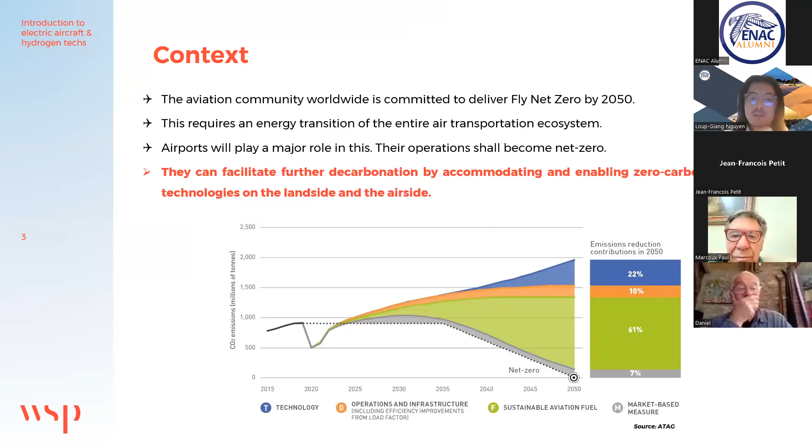So in this presentation, I will talk mainly, of course, about electric aviation, but also how airports in general will have to facilitate this decarbonization by accommodating and enabling all this new mobility technology from the land side to the air side.

So I want to give a quick definition. I'm pretty sure you all know it, but it's always good to have a common definition. So what is an electric aircraft? Well, it's pretty simple: electric aircraft are just aircraft that have parts or all of their propulsion system powered by electricity, stored on batteries or generated from hydrogen through fuel cells. You also have configurations of kind of hybrid systems.

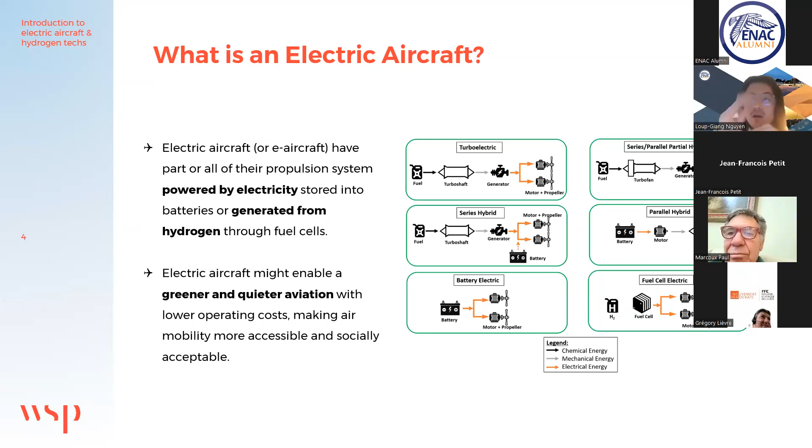And with electric aviation, one of the main objectives is to enable a greener and quieter aviation. We are expecting also lower operating costs and making air mobility more accessible and socially acceptable.

So usually when people think about electric aircraft, they think about eVTOL. But actually eVTOL is just a part of a larger, broader concept. As you can see, there are 3 performance capabilities we can classify under electric aircraft. The first one is VTOL, vertical takeoff and landing, which is mainly helicopters. They could operate mainly in dense urban environments.

And the 2 other ones - the first is STOL. They typically transport between 6 and 60 passengers, and they are suitable for commuter or regional missions. The infrastructure they operate on will be what we call short runways, so runways less than 5,000 feet approximately. And the last one is CTOL, which are just conventional aircraft.

So when I talk about electric aircraft in this presentation, I'm thinking about these 3 categories of aircraft.

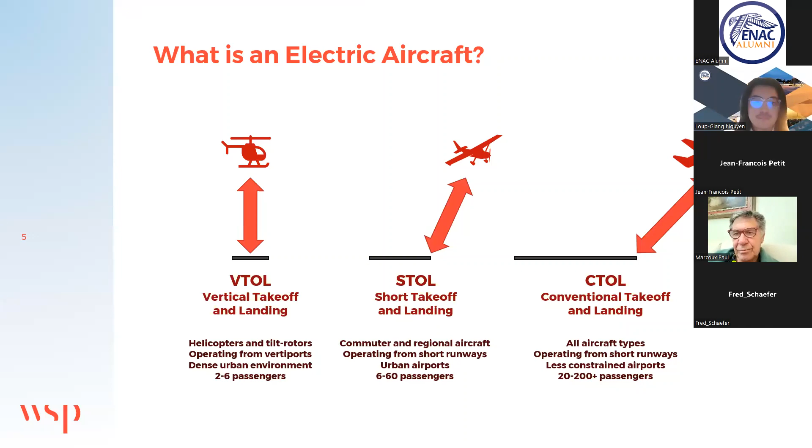Electric aircraft, like I said, it's a broad concept. As you can see on the screen, depending on the characteristics and specificities of the different OEMs, that will have different payload and passengers, and the range will change depending on the size of the aircraft.

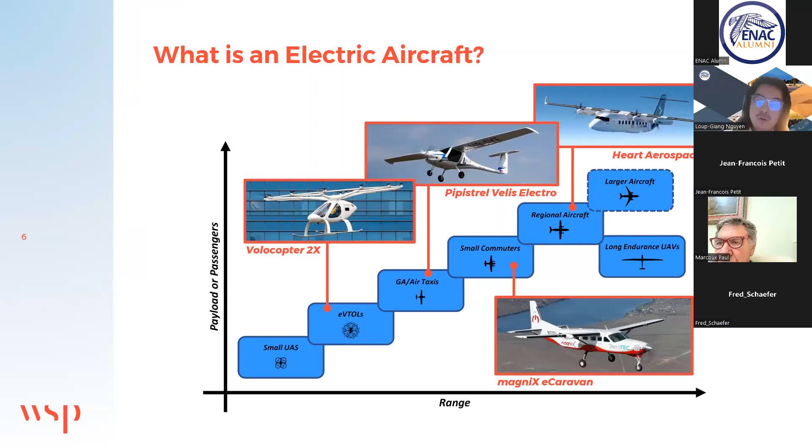So you will have what we call eVTOL, small UAS - unmanned aircraft systems. You have also all the GA and air taxi aircraft, and you can go larger, maybe in the future, regional aircraft, but also larger ones.

So we talk about electric aircraft, we know it's coming, and the first generation of electric aircraft are right here. It should be certified in the next few years, 1 or 2 years hopefully. And the first ones we will see in the market are the smaller ones.

We are expecting also to have larger regional aircraft, and those aircraft, at least for now as we know, will be powered by hydrogen through fuel cells. And those will come a little bit later, so probably in the next 5-10 years.

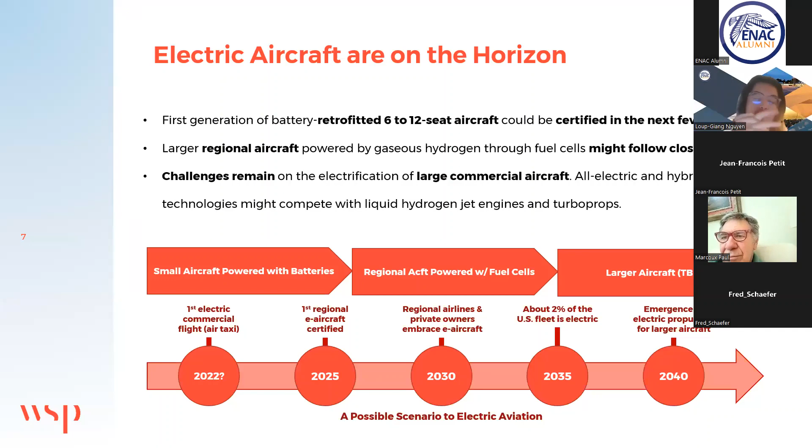And the main challenge when we talk about electrification is the large commercial aircraft. So the industry is mostly thinking about more hybrid electric technologies for those types of aircraft, and we're thinking those larger aircraft will mainly emerge around 2040.

So with electric aircraft, new markets will open. You may have heard about advanced air mobility, which is a new transportation system that encompasses urban air mobility and regional air mobility, enabling new market segments for transportation of people and goods. As you can see on the screen, I identify different main use cases and missions.

The first one I was talking about is urban air mobility, so it's the transportation of people between or in urban dense areas. For those types of missions, we're thinking more about VTOL aircraft, capable of transporting 1 to 5 passengers approximately with a range of 10 or 20 miles.

For regional air mobility, we're talking about more on-demand regional transportation, mainly carried out by VTOL or STOL aircraft, so they will have a bit more passengers and larger range. But we also need to think about air cargo and transportation of medical supply, which can be either urban or regional air mobility, with different aircraft size specifications depending on the range and the payload.

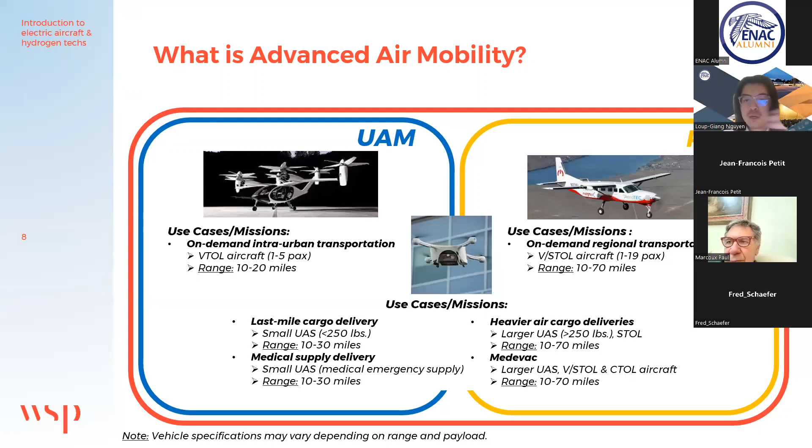With advanced air mobility and electric aircraft, we will see the emergence of new opportunities. Smaller communities will mainly benefit from this. There will be huge opportunities for them with electric aviation, which will open new markets for on-demand, but also scheduled transportation.

So what will be the potential impacts on aviation demand? Electric aviation promises lower CapEx and OpEx to flight operators. As mentioned earlier, we will have the emergence of new markets or mobility, and hopefully it will be more accessible. Smaller communities and smaller airports will mainly benefit from electric aviation, at least at the beginning, and they could become local transportation hubs. If you think about air cargo as well, there is a huge opportunity there through electric aviation.

But the novelty of electric aviation means there is a lot of uncertainty, and we have a lack of visibility on future demand, depending also on local specificities. So as an aviation planner and decision maker, it's not easy to plan right now.

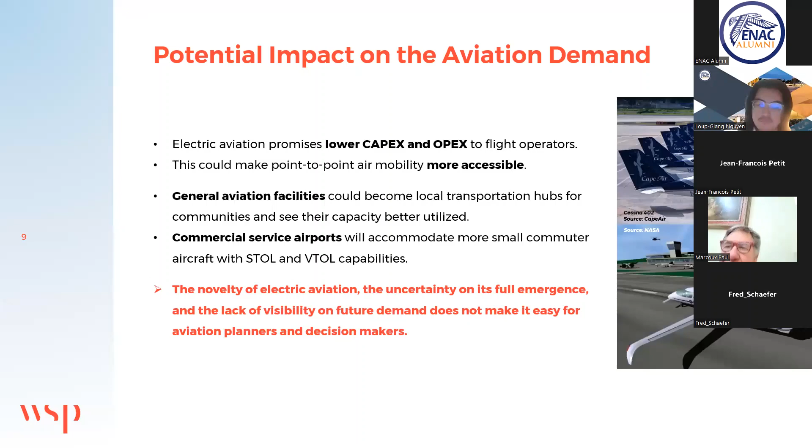The second solution is mobile airport units, where aircraft will be charged through superchargers on trucks or trailers, and for fuel cells it will be tanks transported by trucks. The last one that some OEMs are considering is battery swapping, or container swapping for hydrogen.

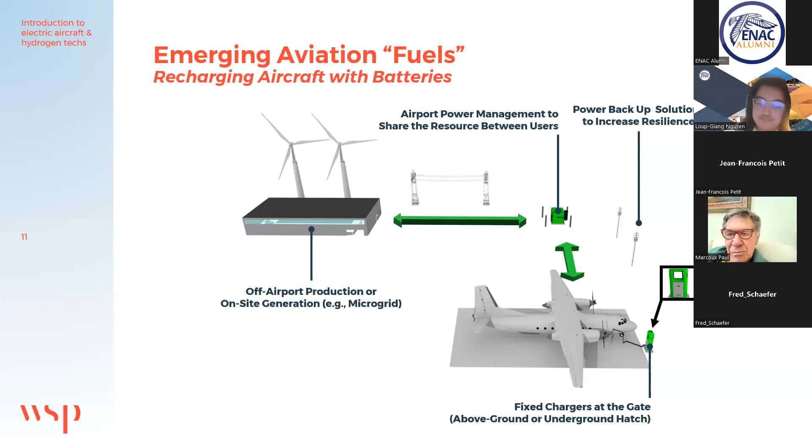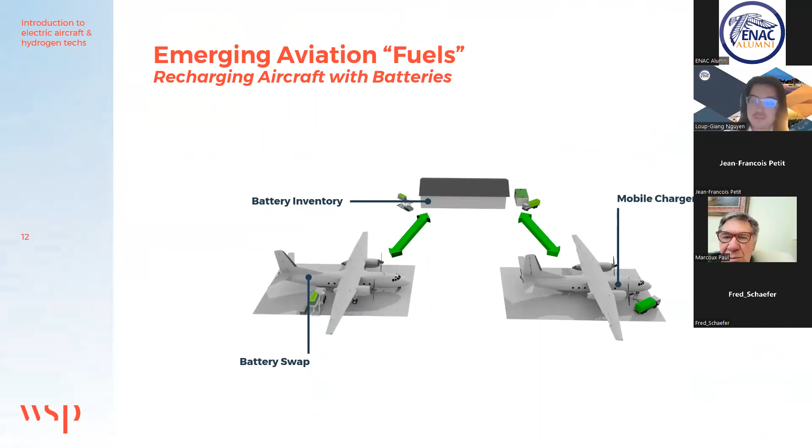Same thing for the two other solutions I was mentioning earlier, battery swapping or mobile chargers. The concepts are a little bit different, but still, airports will have to plan and think about how to bring the energy to the airports. The concept is pretty similar if we're thinking about hydrogen systems. Airports at some point may think about on-site generation also. That's something airports are mainly familiar with using existing fuel, but with hydrogen, same thing, we need to think of how we're going to store it, how we're going to transport it, and how to become more resilient as well.

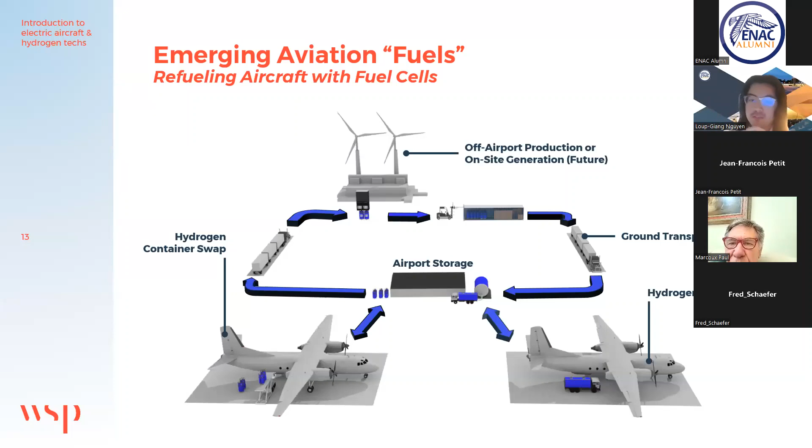So talking about power supply requirements, the big dream of OEMs right now is to provide an infrastructure capable of delivering a full charge in 5 minutes. Recent research has shown that if we want a full recharge in less than 30 minutes, that will require megawatt level charging, which is pretty huge, right?

Electric aviation, especially at smaller airports, would create a new paradigm. That's something completely new that smaller airports will face, and it needs to be planned properly and way in advance in order to be fully operational. As I mentioned earlier, electric aviation will add other electricity users that need to be accounted for at airports.

Now, when we talk about megawatt level charging, power supply and management become a critical element for airport and aviation system resiliency. To do so, utilities master plans that consider local power generation can help address these challenges, especially when we think about resiliency. So airports need a holistic approach to electrification and need to develop power supply resiliency.

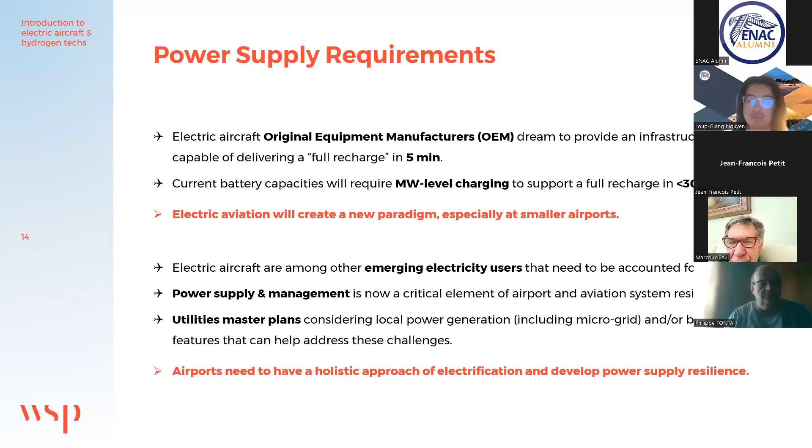There are different solutions we can think of. If we think short-term, smart power management could be one of the early adopters. Airports may want to distribute the charging solution so as not to have a peak charging time. That's something airports may implement at the beginning, trying to distribute it evenly during the day.

If we think of longer-term solutions, airports can develop sustainable and large-scale supply chains. We're thinking about on-site power generation and microgrid approaches that could help address these challenges.

Airports are already thinking of it. I can give you the example of SFO — they already have solar panels. So with electric aviation and all the supply requirements that it will require, on-site generation is something that will help, especially if we think about energy resiliency.

Also, if we think about on-site airport power generation, it can increase energy resiliency for the local community. In case of a power outage, for example, airports could be power sources for essential facilities. So to conclude the slide, yes, on-airport energy generation will support not only the energy supply for electric aviation, but for the entire airport, will enable new revenue generation, and will increase operational aspects.

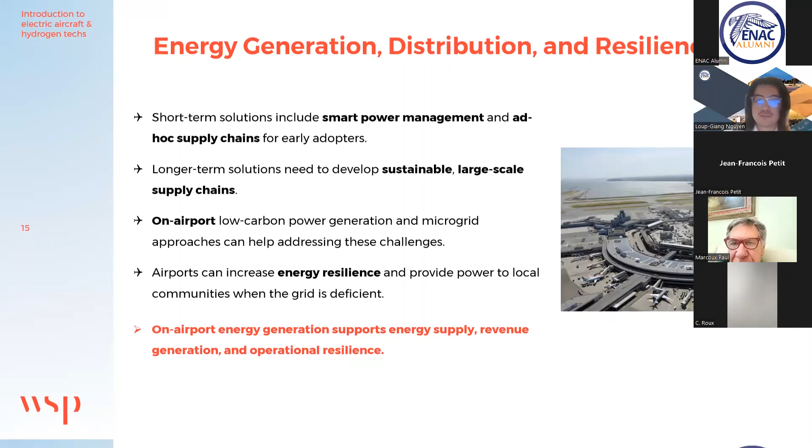I'm going to talk also about the different guidance that's already in place. This year has been a quite interesting year — the first technical guidance documents related to electric aviation and its implications for airports have been released these past few months. The first one is ACRP Research Report 236. ACRP is a research program in the US sponsored by the FAA. This research report is a guidance document that will help airports and aviation practitioners prepare to integrate electric aircraft and understand all the implications.

A second one that will be published probably soon, hopefully by end of year, is 243, which is more related to advanced air mobility. NREL, the National Renewable Energy Laboratory here in the US, has also published a technical report on electrification of aircraft, covering the challenges and potential impacts for airports.

The industry itself is also starting to put a lot of effort into industry standardization — I'm thinking of electric charger stations, for example. SAE International has started a lot of working groups leading efforts regarding some standardizations.

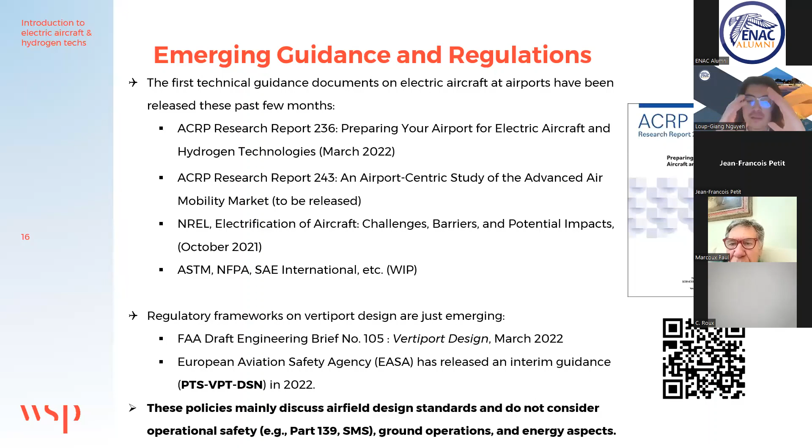Talking about regulatory frameworks — right now the FAA has published a draft engineering brief this year about vertiport design standards. EASA, similarly, released around March an interim guidance to help urban planners and aviation planners, which are kind of the first design standards regarding vertiports. But all this framework and policy does not contain any operational safety, ground operation, or energy aspects. That's something that needs to be taken into consideration in the next few years as well.

So when we talk about electric aviation and we want to commit, and the industry wants to commit to fly net zero by 2050, we need to think electrification of everything. It's not only the electric aviation need to push forward, it could be a nice way for airports to electrify all the operations.

So it starts from the land side. You know that electric vehicles are emerging and already on the market. We talk also about automated and connected vehicles, and all the infrastructure behind it will probably be electric. So that's some of the aspects that airports need to think of.

Passenger terminal as well. There's an emerging trend on electrifying everything in it. To give you an example, heating system - that's something that a lot of airports are thinking to convert to electricity.

And airside, we talk a lot about electric aircraft, but there are also a lot of operations already in place to electrify. I'm thinking about ground support equipment vehicles. A lot of airports are electrifying their fleets, but we need to think also about conventional aircraft. A lot of the equipment is converting to electric, thinking of, for example, APU. So airport electrification is something very important, and basically the airports will transition to one single vector of energy.

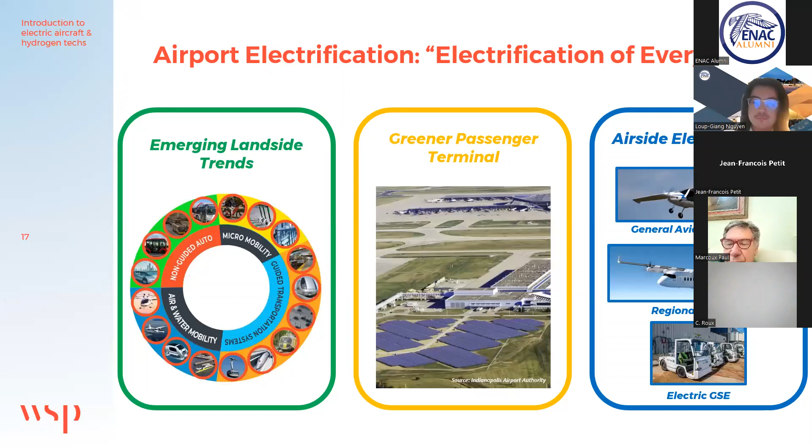So another nice tool that I want to discuss, featured in the ACRP Research Report 236, is an assessment tool that can be used for utility planning, and that helps airport practitioners or airports estimate the future electric demand growth due to electric aircraft, but also, as mentioned in the previous slide, electrification of everything. It's a simple spreadsheet that you can find online in the research report when downloading.

And basically, as an airport practitioner or as an airport by itself, you could, based on the future electric demand, the future aircraft operation, but also landside transportation, use the tool to help identify and estimate the future growth of the airport. It can give you the total airport growth, but you can also specify which aspects you want.

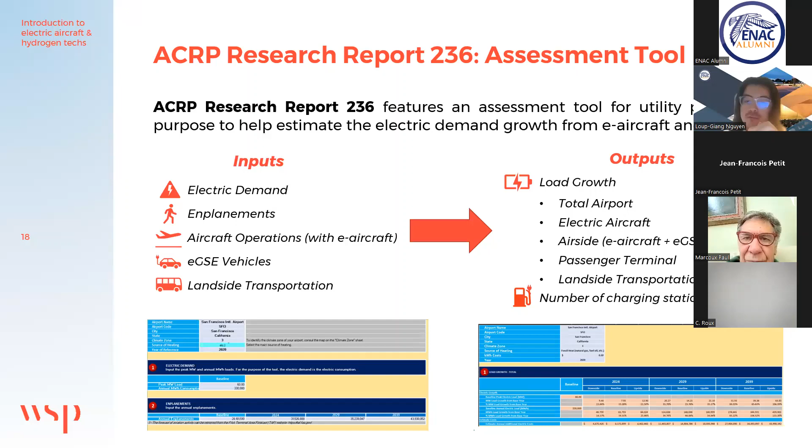So you can estimate the electric growth only due to electric aviation, the airside by itself, but as well the passenger terminal landside transportation. And another nice output that the tool can give you is the number of charging stations.

Okay, so to conclude my presentation, we know electric aviation is right here. It's coming. It's a huge opportunity for us to have a more affordable, greener, and quieter air mobility. And it is the right time for the aviation community to start addressing all the airport compatibility issues.

And when we talk again about airport electrification, it's not about only electric aircraft. We need to think about all the ecosystem, starting from the land side to the terminal. And the standards and practices that we have right now are mainly focused on the designs, but they need to evolve and take account for new energy vectors and to ensure that operational safety and efficiency are taken care of.

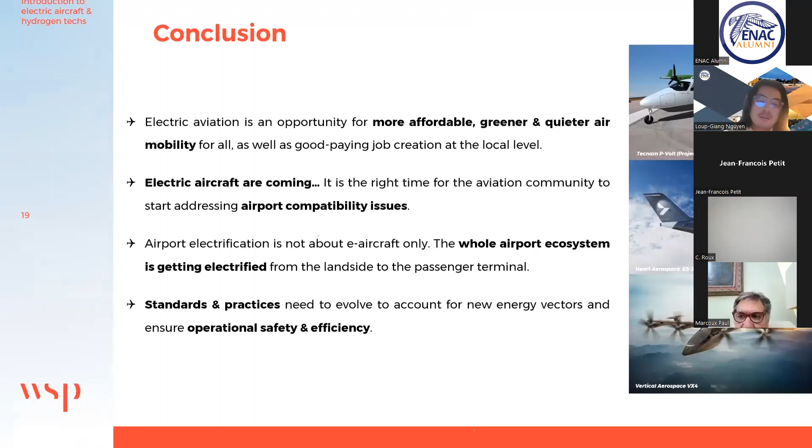So that's it for my presentation. Thank you for listening to me. And if you have any question, I will read it through the chat and we can discuss.

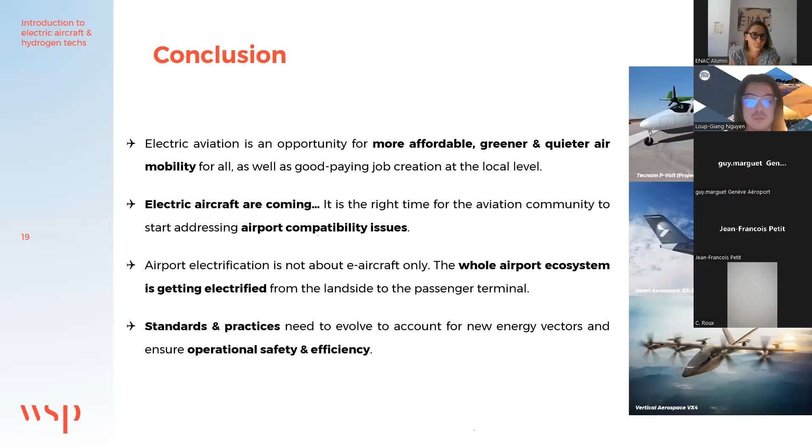If we think about operational resiliency, yes, we have to think about smart power supply management. We will have to plan in advance on how we're going to bring the sources. One of the solutions, depending also on the local context, is on-site generation. There's a lot of airports, at least here in the United States context, that start to think about on-site generation resources because if you cannot bring the energy to the airport, how are you going to run it? So that will be a main challenge of electric aviation, and that needs to be planned way in advance. When you think about accommodating electric aircraft as an airport, you need to engage directly with your utility provider to think about all these aspects, mainly resiliency.

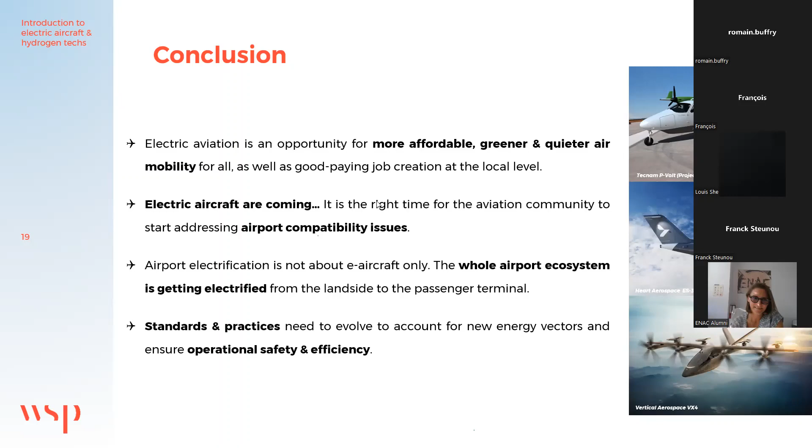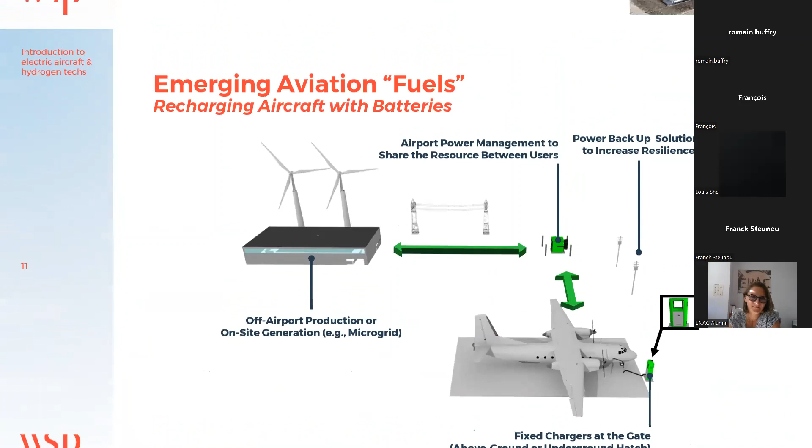Yes, yes, do you hear me? Yes. Yeah, sorry, this is Franck Steunou speaking. You couldn't hear me a few minutes ago due to my headset stuff. I'm sorry, my question was about the beginning of the presentation. I remember you classified, you had a table where you classified the hydrogen solution in the column of the electrical aircraft. Could you clarify that? Because hydrogen is not electricity, we need electricity to produce the hydrogen, but why is that?

When it's all electric technology, we see here on the left side hydrogen. So when we talk about electric aviation, yes, we mainly think about electric battery, but there's also an emerging trend of generating and powering the propulsion system through gaseous or liquid hydrogen through fuel cells. So I know it's written all electric, but it should be all electric and hydrogen, I guess. When we think about electric aircraft, the industry is thinking there are two main sources for power to generate the propulsion system.

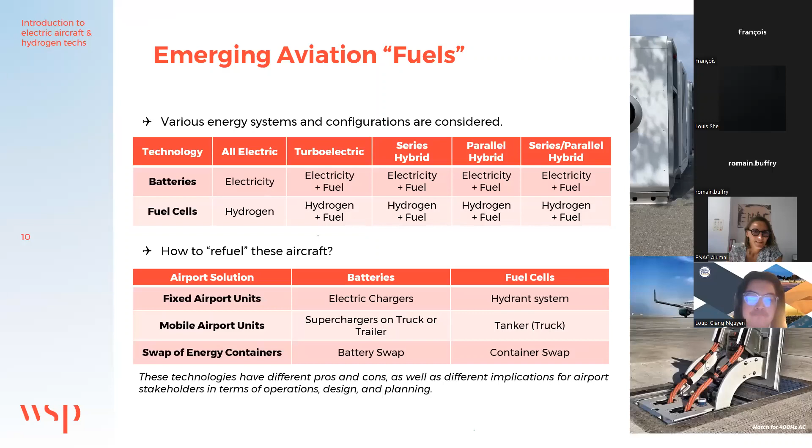Okay, thank you. Martin asked a question in the chat. Martin, can you open your microphone? It will be easier. Hello, can you hear me?

Yes, yes, yeah, I was just wondering what kind of role the government can play in this story. Would it be possible for them to provide some kind of guidelines or subsidies for local aerodromes? Because in local aerodromes, the installation of charging equipment is not going to be that quickly adopted, especially for just local fun flying.

Yeah, totally agree with you. I mean, for now, policy doesn't exist. So that's something the government and all the federal agencies need to think of and start to develop. And when you think also about installing all these chargers, we could see, and I can talk about the US context, for example the conversion of ground support equipment, there's a lot of grant assurances that help airports convert their fleets. So we could see something happening also for electric chargers, for instance.